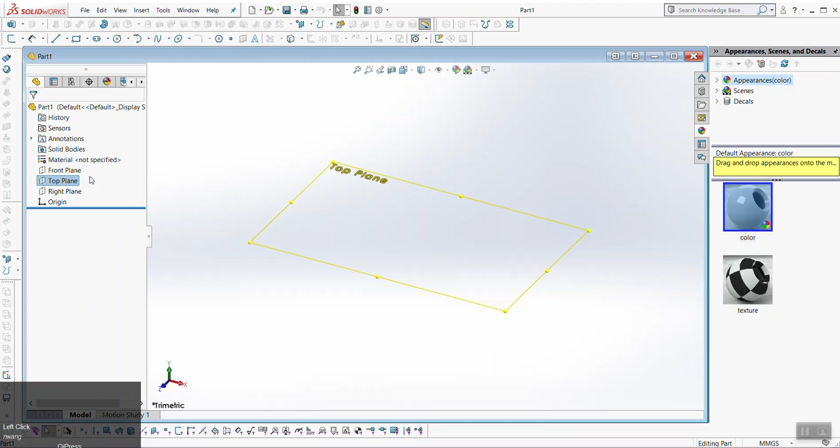Let's all go ahead and, if you have SolidWorks open, go File, New, and we're just going to create a new part. We're then going to take our top plane and create a sketch on it. So for me, when I do that, I go Alt-S. We can use here a center rectangle. It just saves us a step.

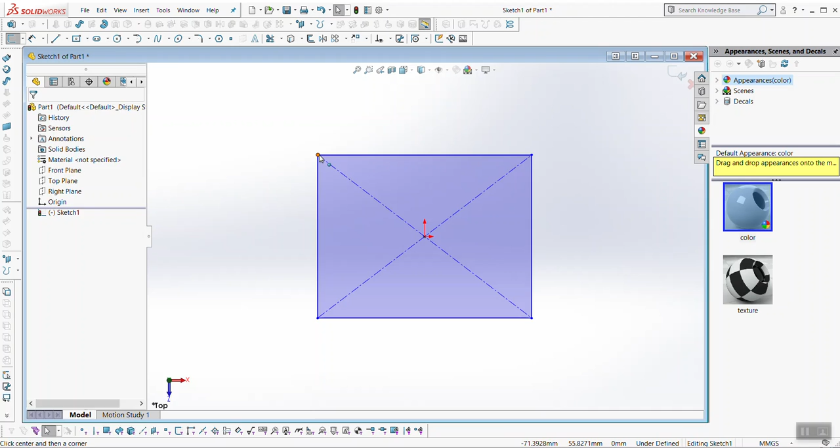It's very rare that I use this. I typically do a corner rectangle and then draw one of these manually, but that's fine. Honestly, for this demo, it doesn't matter what size it is. We're also, God forbid, not doing a master sketch. Oh no, Noah's going to kill us. We're going to extrude this right away.

So, okay, I want you guys to be aware of a couple things. One, I've never pointed this out before, but there's this thing called draft right here. Okay, so let's say I want to extrude this object 25 millimeters. No, this is weird, my scale's weird. Maybe I should have told you guys what size to make this. That's fine, it doesn't matter. Just make sure it looks proportionally roughly similar.

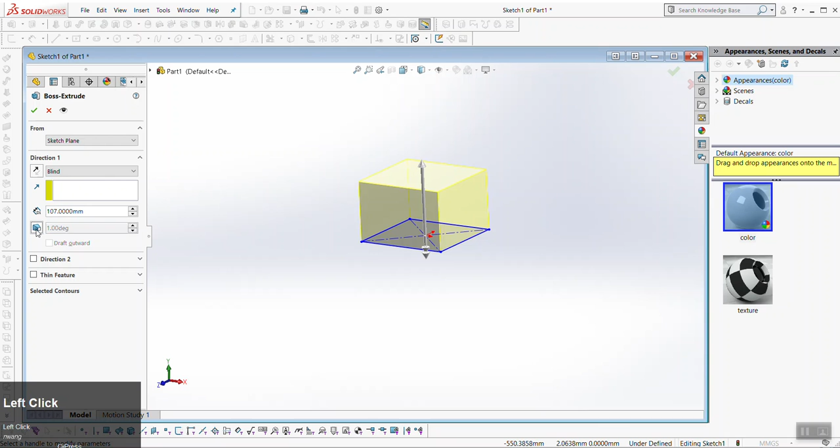Notice that you can click this draft and you see, guys, what happens. It tapers in, right? If I click the other one, it tapers outwards. If I check this box that says draft outwards, it tapers outwards. Now you can play with this dimension. You'll notice the more extreme you make it, the more tapered it gets.

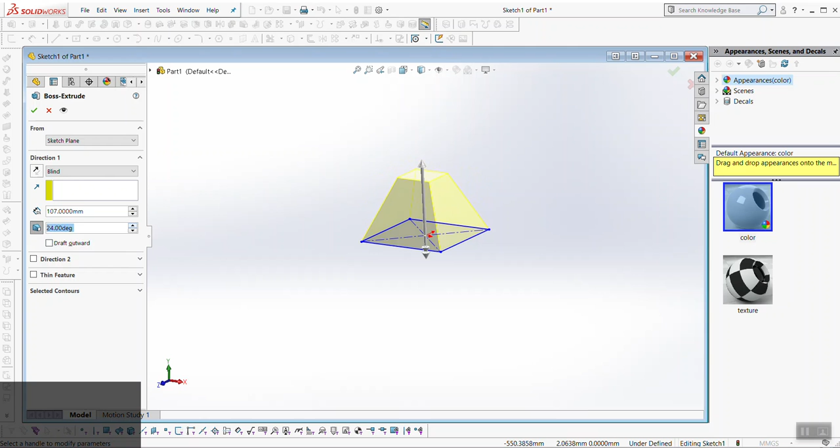Here we go, my brain's gonna stop working. For a rule of thumb for all of you to follow roughly, safe draft is about 3 degrees. As long as you have one though, you're good, honestly. Most engineers that you're working with, comfort level for them is 3. Now it depends, that's very situational, okay?

If you have a very smooth surface, do you think you want more draft or less draft? This is kind of a trick question. What? Yeah, really smooth surface. Oh, I need less draft. That's why I said it's a trick question. It seems like you would need less because it's smooth, it's easy to come out. So here's the problem. If you have a very smooth surface, there's a bigger chance you're going to see tool marks left on it from the two things sliding apart.

Yeah. Texture is a good design detail too. If you have a very sexy surface that you spent a lot of time on and you want it to look good, you want to render that full gloss so that it's really pretty. If you are using a budget manufacturer and you're not confident in their ability to match what it is, you want to specify a texture on your model.

You guys are familiar with Pantone. It was mentioned earlier. There is a texture equivalent called Mold-Tech. Are you guys familiar with this? Oh, maybe you're right. It might be, I don't know. I thought it was Mold-Tech. I don't know if this is their website. Anyway, yeah, I think this is them.

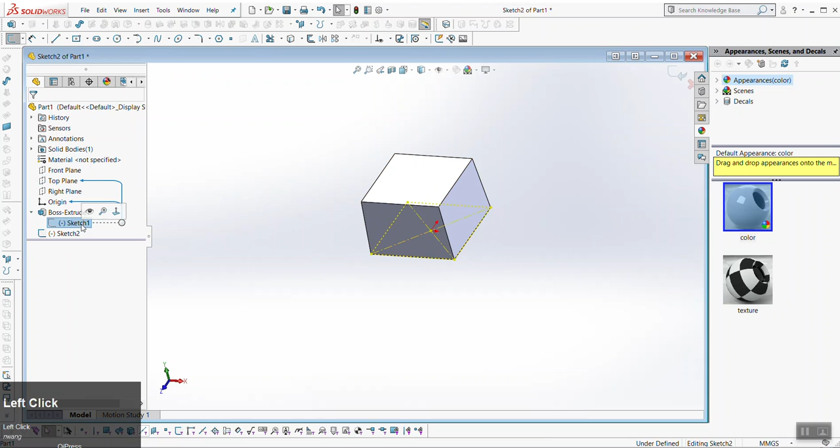So now let's take the top plane again, create a sketch on it. And what we're going to do, we're going to take our first sketch, we're going to copy it. So I'm going to click on the sketch and just click convert entities. Yeah, not the top, not the skinnier part. I mean, yeah, that's a good observation though. Look, if I take a top view, you'll notice the sketch is bigger than where it ended up. Again, because it drafted, it tapered inwards.

So on this one, also hit extrude. We want to go the opposite direction this time, and this time don't put any draft on it and don't merge it. So again, everyone, you should see you have a solid bodies folder here with two parts. One's drafted, one isn't.

If everyone's caught up, what we're going to do, we're going to hide this first body. And I just want to show you guys how to do draft as an individual command. So there is a draft feature. Sometimes you'll build a complex part and then you need to add draft at the end. But you can use this feature here by clicking on it, and it will bring up a new feature dialog.

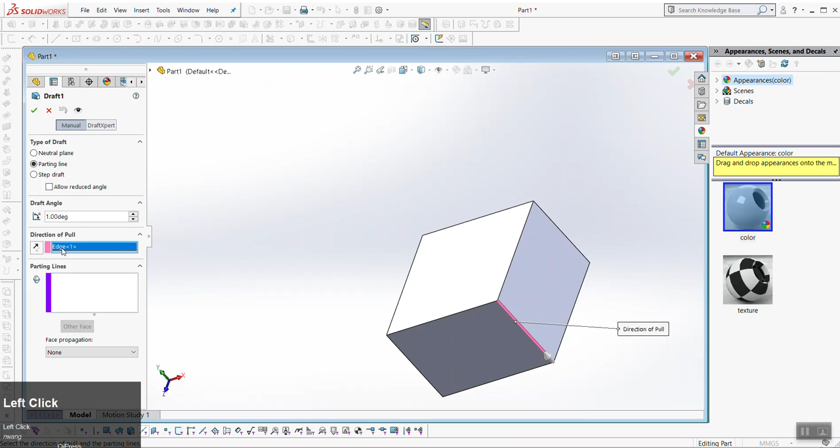Let's see, it defaults to neutral plane. Then there's parting line, step draft. Let's go with parting line. We want our parting line in the middle, so we're going to select this. Although, wait, let's see, direction of pull, that does require a line. Never mind, I'm sorry. I take that back. We're going to start with neutral plane. And then we're going to take the top plane. That's our neutral. I believe this arrow is the direction the part pulls.

I'm going to check this. My God, sorry, hold off a minute. Yeah, did that work? Okay, cool. I'm sorry. I did not check this beforehand.

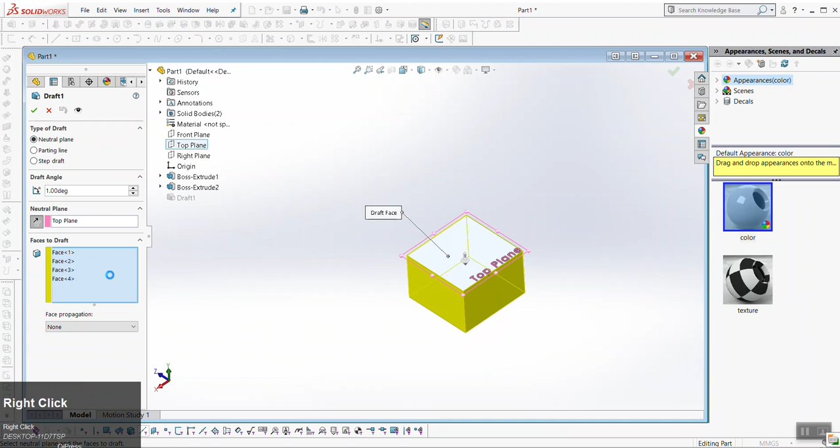Okay, so we put our draft command. We went with neutral plane. I said pick top plane. The arrow is the direction. I just checked this, and now of course I'm blanking. I believe it was pointing up, so that is the direction that the part will be released from the tool. So it drafts, it tapers the opposite direction of the arrow.

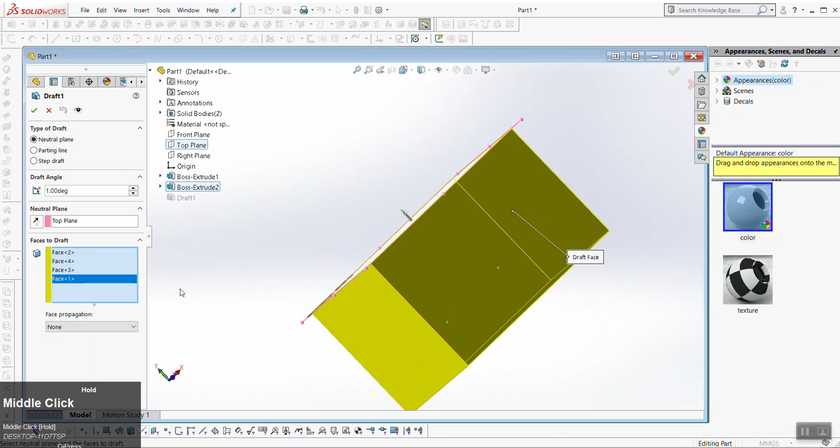So now, of course, we want to pick faces to draft, and we're going to pick all of these vertical faces all around the way. Again, because this is a unique feature, you can always select just 3 faces. Maybe you only need to draft part of it. I don't know. But for this demo, let's just pick all 4. Let's again go to 2 degrees and then click the check mark.

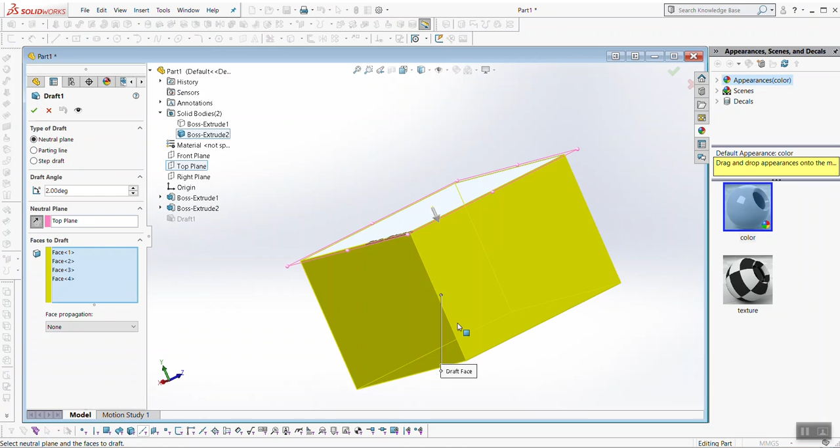I'm sorry, I lied. The arrow, okay, I'm sorry. The arrow needs to point down. The arrow points the direction that it tapers. I apologize. I switched it and then I mixed it up. So sorry, let me start again. We pick the top plane as the draft. Make sure the arrow is pointing the direction you want it to taper, okay? So in this instance, we have it pointing into the part because we want the part to taper. And then click the checkbox.

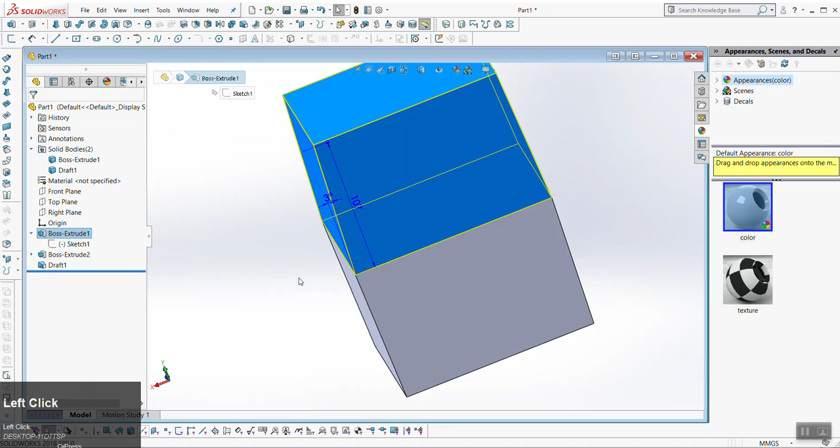And now we have 2 things. Essentially, we achieved the same thing in 2 different ways, is all we did, okay? For this class and for project 3 specifically, I just want you guys, when you put part lines in your objects, and again, when you start by mimicking, the part line should be in a logical place to begin with.

If you start to make adjustments though, just put your part line somewhere that seems logical, and that's all I ask. If it's slightly off, I guess I'll give you guys more details when we get closer to that, but all I ask is just have it be logical. It doesn't have to be perfect, okay? So you do not need to build draft in. I just want to give you guys these tools.

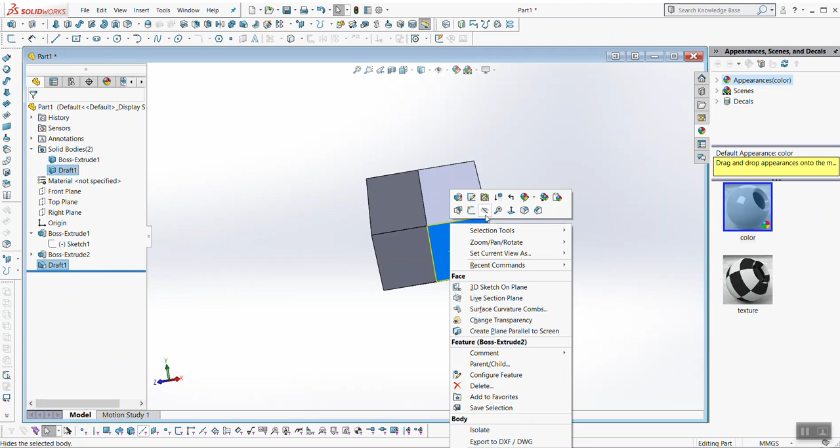Last thing that I want to do, okay, so any questions on what we've done so far? Okay. For what it's worth, I will sometimes use draft as a design element. Trevor, before you were asking about how I cut that face on my microwave, sometimes I will cut a face with severe draft, like 45 degrees, 25 degrees, to get a built-in bevel. That's perfectly acceptable. It's not what it's designed to do, but it's okay. An engineer might turn their nose up at you for doing that, but that doesn't matter.

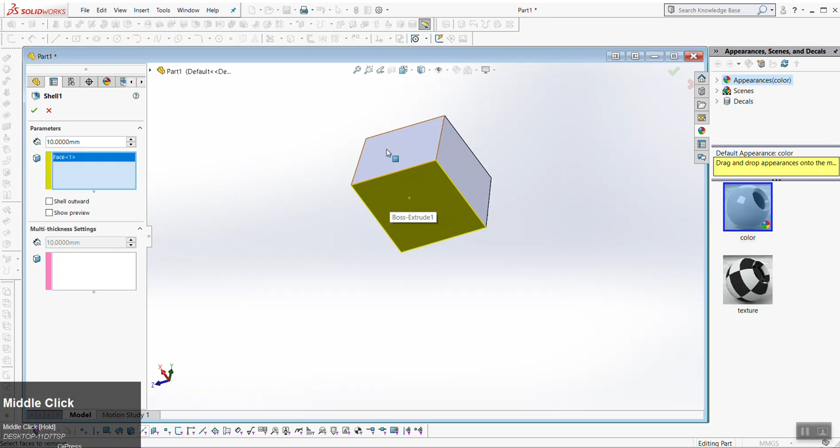Okay, last thing I want to do is show you guys how to shell, right? A shell just gives a part a cavity. So I'm going to hide that bottom body we just made. I'm going to go up here and pick my shell feature. And here, this is asking what face do you want to be hollow. So logically, I would pick just this interface here, but you can pick more than one face, right? I could pick these 2 and click the check mark, and you'll notice right now these are both open. But what I want you guys to do is just to pick this bottom face here.

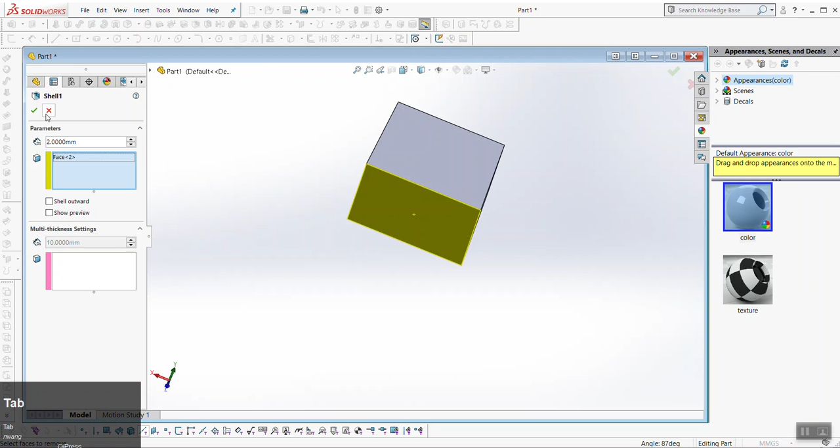Typical wall thickness. I mean, I could grab some calipers and I want to say this is like 1 to 2 millimeters. But let's just go 2 millimeters on our wall thickness here. So what I'm showing you guys is what's called a standard clamshell design. This is a standard clamshell, right? Any idea where it gets its name from? Looks like a clam, right? Yeah. Exactly, like it's two pieces that puzzle together, okay? And this is very standard.

Again, if you start to observe objects in your environment, like, not this one. Anyway, whatever. This is my best example right here. They have this design. So the inside is then shelled. If we hide this bottom face again, we're going to look at a new,

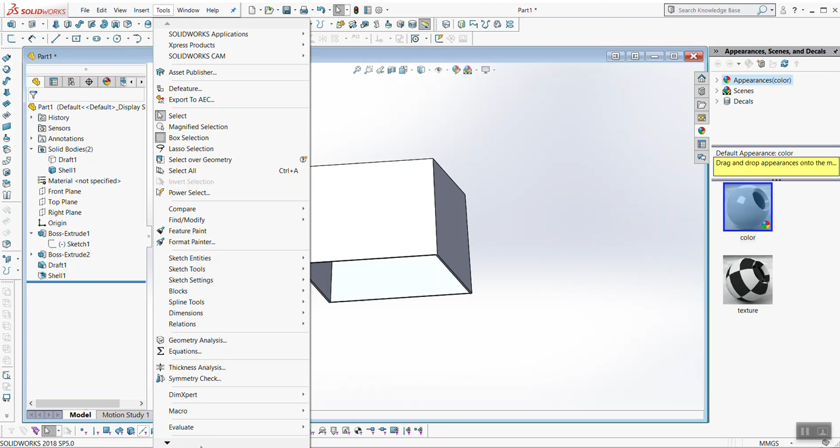Where is this here now? Oh my gosh, I'm totally blanking on it. I'm sorry, guys. I'm looking for... I thought it was under tools. No. I apologize. I'm looking for draft analysis and I'm totally brain farting on where it is. I thought it was under evaluate, tools, but it's not in here. Where would... here we go. I'm sorry.

It's under display. Okay. If you guys go to view, display, it's right here, draft analysis. If you click on that, it's going to bring up a new dialog box. This is not a feature. This is just like an evaluation tool. It's asking you what plane to select. If you select the top plane here,

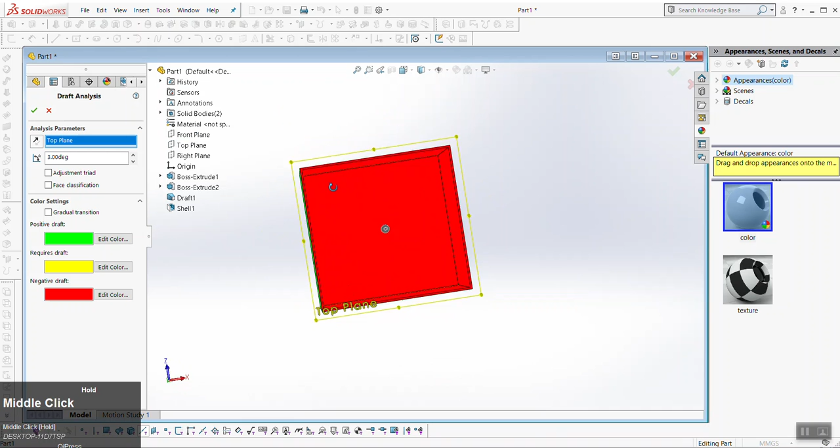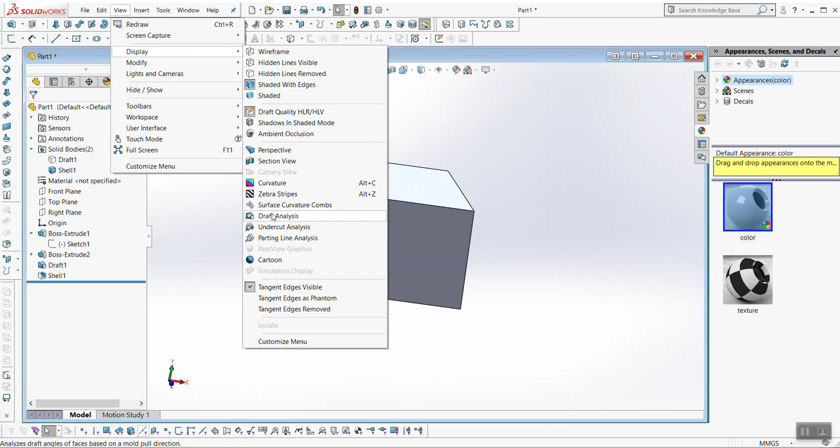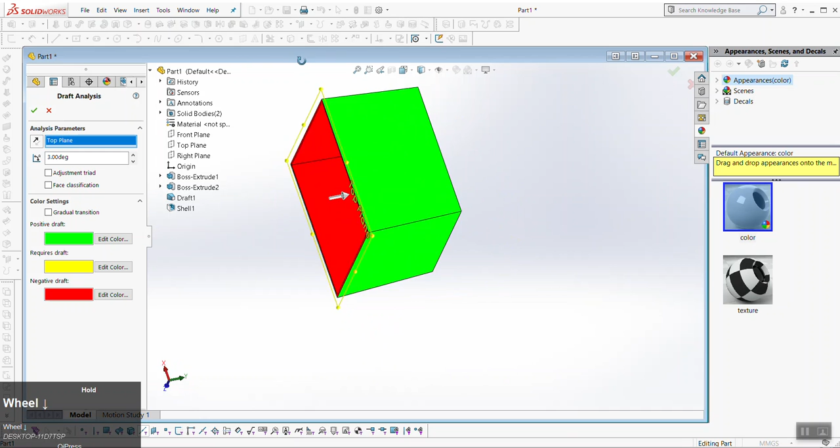Under view, display, oh, sorry, yeah, I missed it too. It's right here, draft quality. Yeah, you gotta go lower. Here it is, draft analysis. Again, it's asking you what your neutral plane is. And again, this is kind of like the plane that the part line exists on top of. So here it's on the top plane. And here, everything green is one direction, everything red is another direction. If you ever see green within a pool of red, it's a bad thing. So here, let me edit this and I'll show you maybe what that would look like.

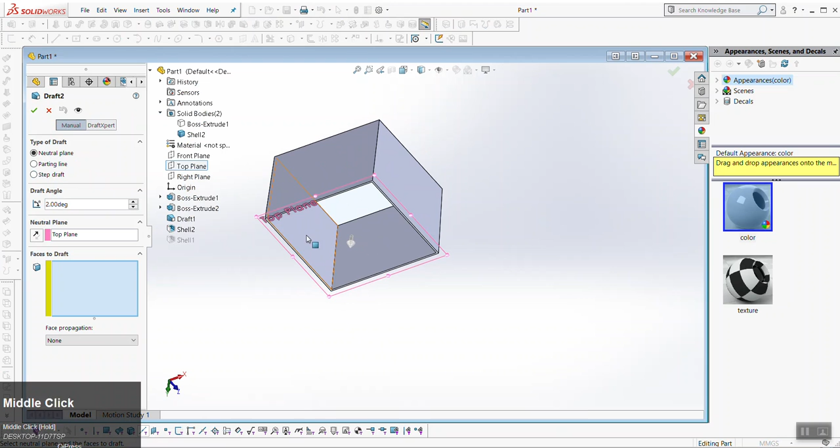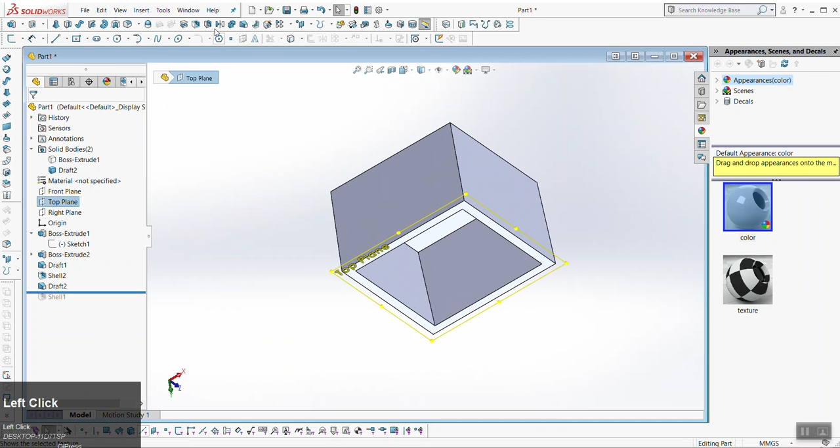So let's say I don't draft this face. Shell this, and then in fact on my top, I could add negative draft onto this face. Did I do that in the wrong direction? Yeah, my file's all goofed up now. Here, let's turn the shell down to 10. Now I put my draft analysis on. If you ever see anything like that, that's called an undercut or reverse draft. That's bad.

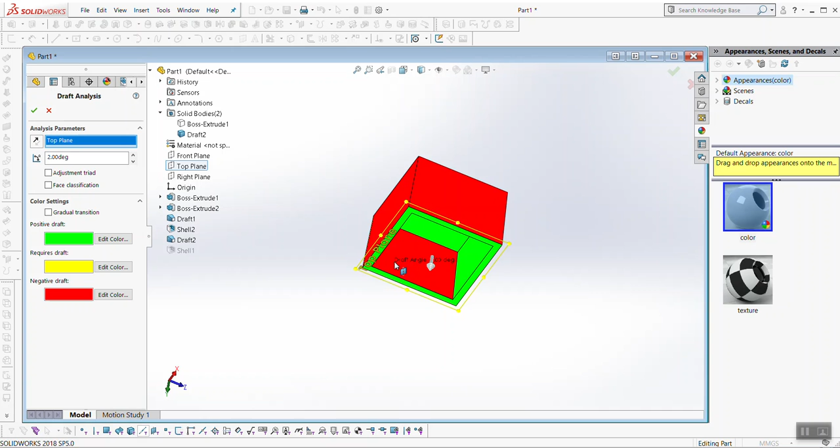Again, a lot of this is higher level stuff that I don't necessarily expect. Just use, to the best of your knowledge, knowing that there is draft, to put your part line where the object is at its widest point, where it kind of opens up. And then again, for our needs, maybe if there is one main takeaway here, it is that when you do have a part line, it is sufficient if you just put a fillet running around the edge; you can have them touch.

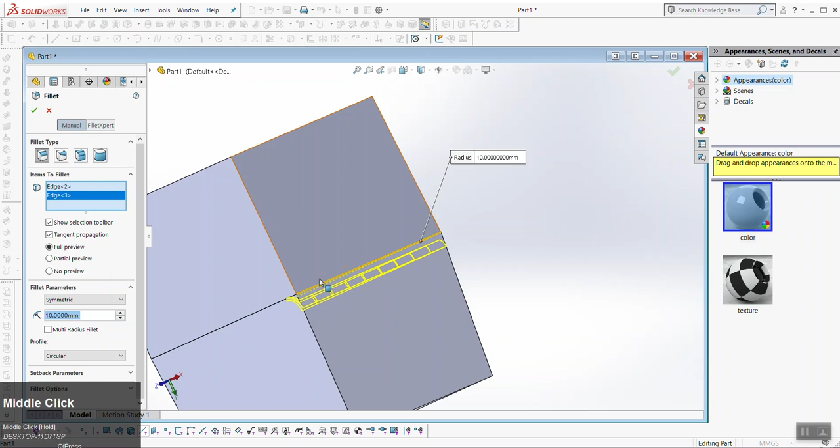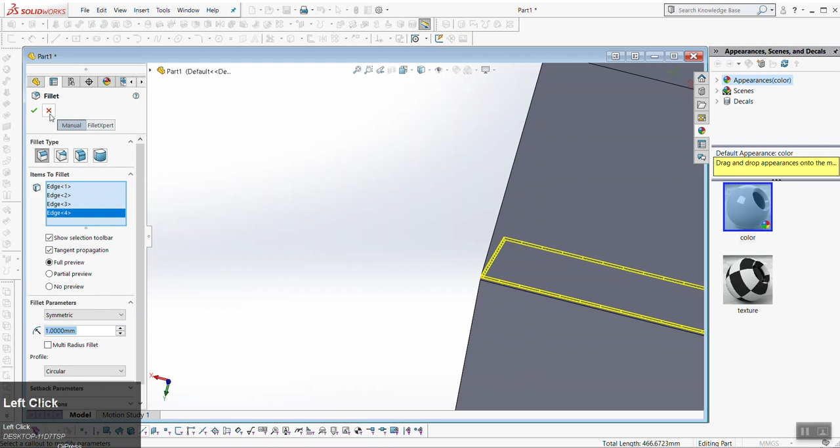I would put like a 1 millimeter fillet on there maybe, or it depends. It's totally up to you. I probably wouldn't go bigger than 1 millimeter, and I probably wouldn't go smaller than like, I don't know, 0.5, 0.2. But now when you render this, having that slight cut like that, that's going to look good.

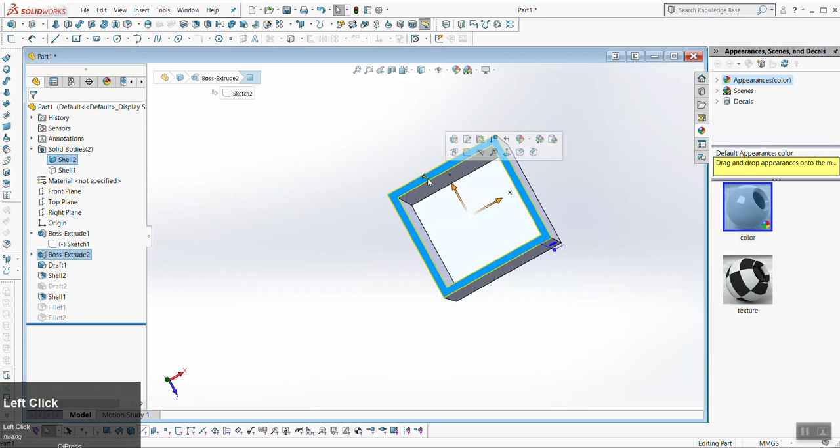At this point, you guys don't need to follow along, but I do want to just show you a quick way how to do a real part line if you wanted to do that. Again, you can take the face where your part line is. Whoops. Copy one edge. You could even just offset this 1 millimeter, 2 millimeters.

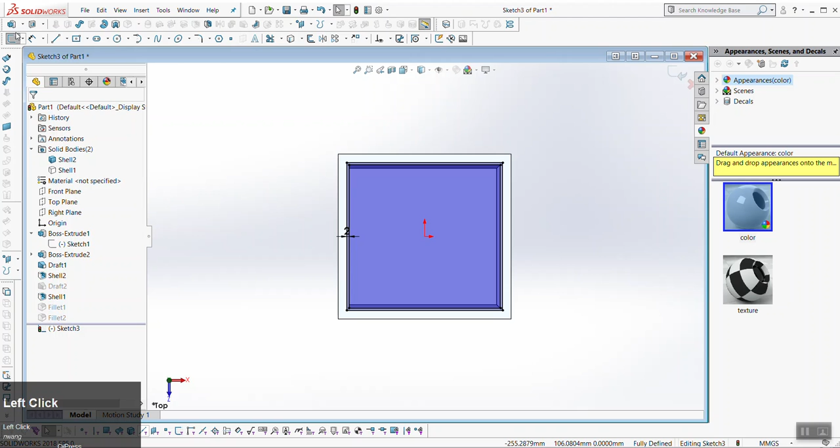Make a low extrude of about 2 millimeters, let's see, 4 millimeters long, 5. Again, we can observe this and look at how long this wall is. That's not more than 2 millimeters, whatever. We'll say 3.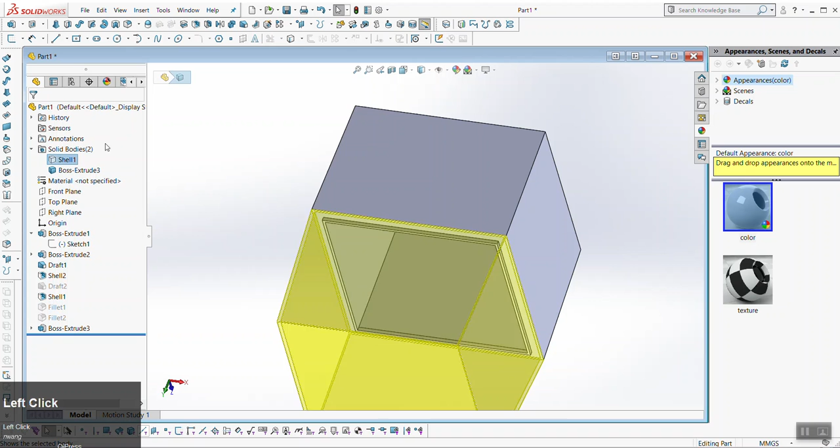And then on this other part, you could do the opposite. Or in this instance, if we just give this a slight gap now of like 2 millimeters, again, we're going to get this kind of realistic view. I guess they've misaligned quite a bit, but I think you guys get the point, right? You do a small offset on one of the lips and extrude it. On the other one, you would do the opposite lip, and then you get something that looks like

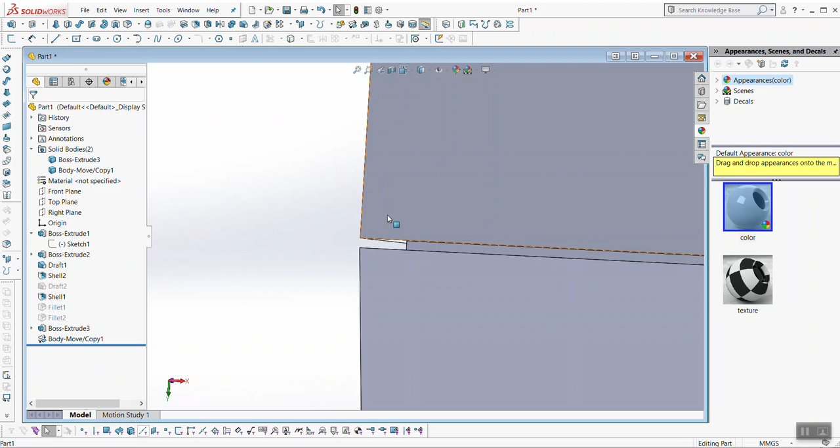that. Oh, yeah. You guys did do a part line in project 1, or the tutorial. You're right. Any questions on this? Yeah. That's a good question. Let's look at what I have. I just didn't save what we did. That's fine. Wait, which orange face? Oh. Gotcha. I see what you're saying. Let's look at that so we can talk about it. Yeah, I remember. You were talking about this one.

Yeah. Oh, absolutely. You can always split the part at the end. And you could use the draft tool if you were trying to be more accurate to add that feature. Here's kind of where I stand with this, okay? If you put the part line here, I might question you, because this is reverse, this is very steep going the opposite way. Even here, it's somewhat questionable, but it's okay. The lower it is, the more believable it is.

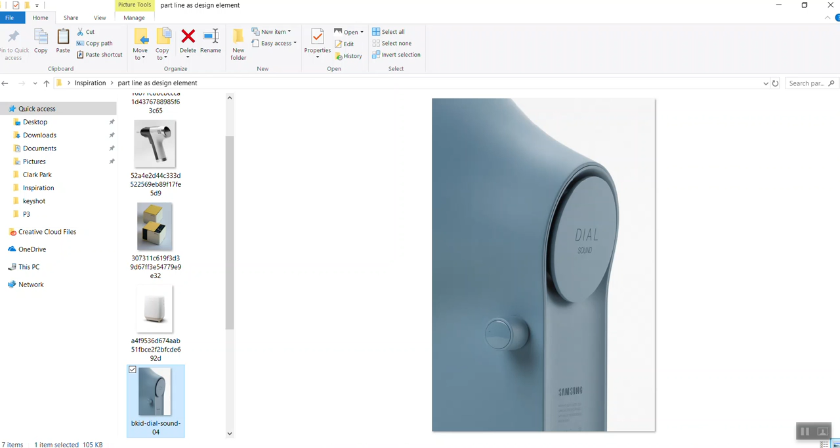Absolutely. You can build, and in fact, that's what I would recommend. I would almost recommend you build the form all as one to begin with. That is the other way you could use draft analysis. You could literally use that draft analysis tool and see where the part line should be. So I'll give you an example here. Right? Where that yellow line is, that's probably where there'd be a good part line.

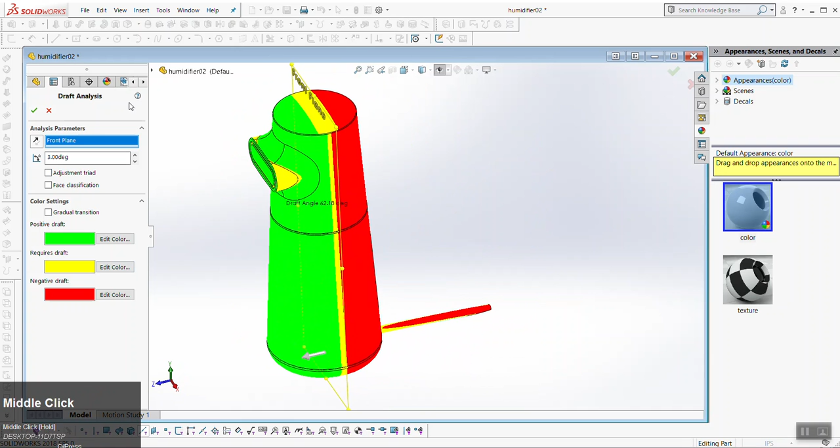I can change this and see, hey, could I put the part line this way? Yeah, that kind of makes sense. How about on the top? And then here it's telling me where the part line should be. It's right here, but look at that. That is where the part line is. So that there's no mistake there.

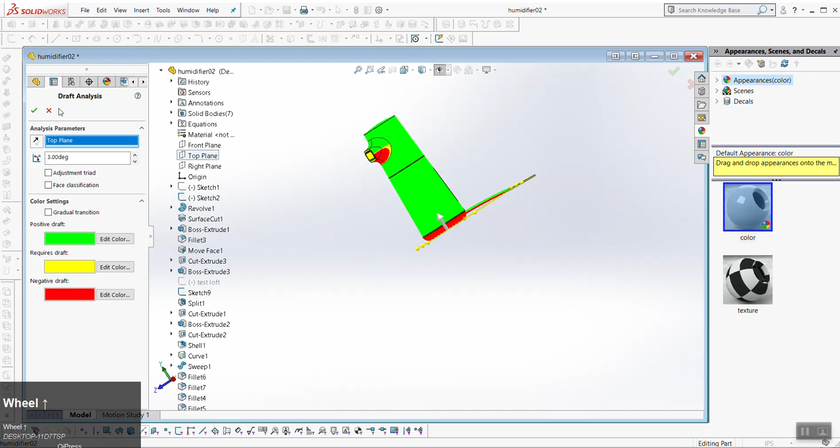Simply fillet it, and that's all I expect you guys to do. Yeah. I did these part lines, I think, with a split line. Or no, let's see, where is this? Here it is. It's right at the top. Yep. And I built it in halves.

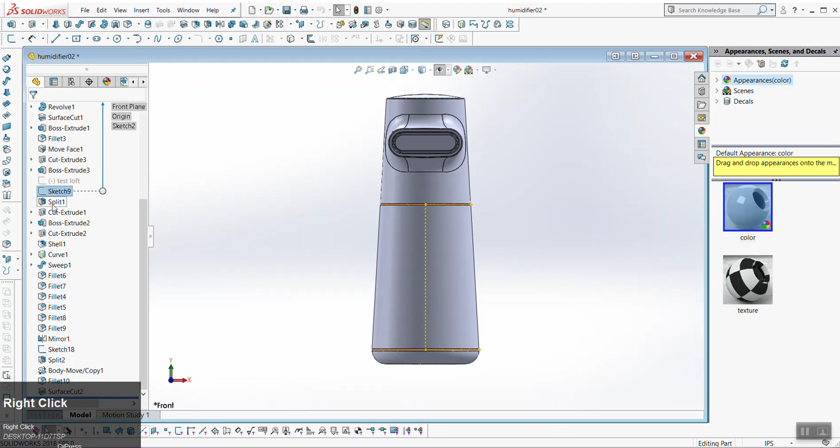Honestly, if you're mimicking one of these objects, chances are the part line's in the right place to begin with. So you could keep that in mind, like, okay, maybe I shouldn't have something that tapers the wrong direction from where it's already tapering. I should just exaggerate a taper. So here, let's look at what I did, my redesign.

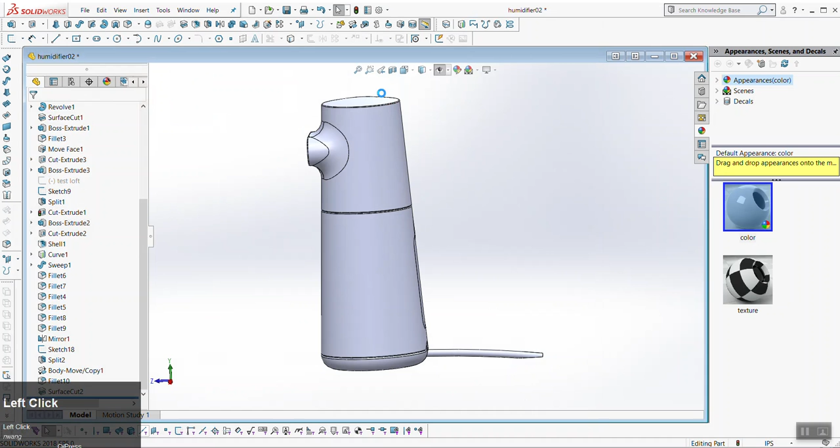I moved a part line to the top here to split this. So that's the one criticism I have of this one, is this part isn't moldable. It is moldable with...

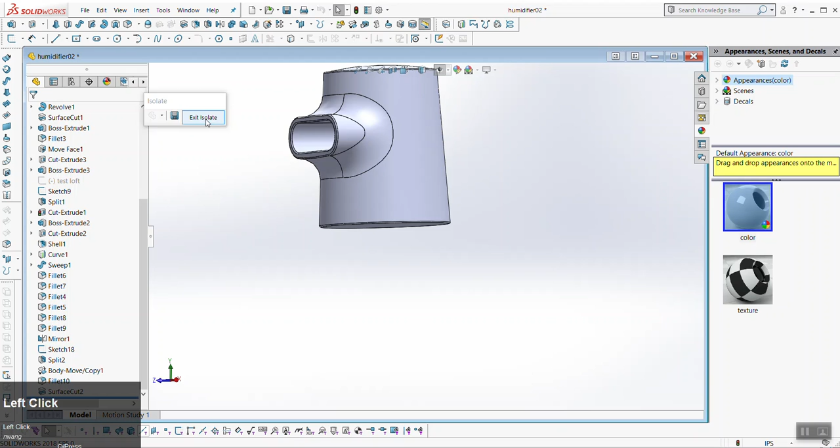Have I showed you guys this isolate feature, by the way? You can select a body. If you right click on it and say isolate, it hides all other bodies. So it allows you to work just on that. And then you can always click exit isolate when you're done. All that's doing is you're saying, hey, out of all of these bodies in the list, only show me this one. That's all that isolate's doing.

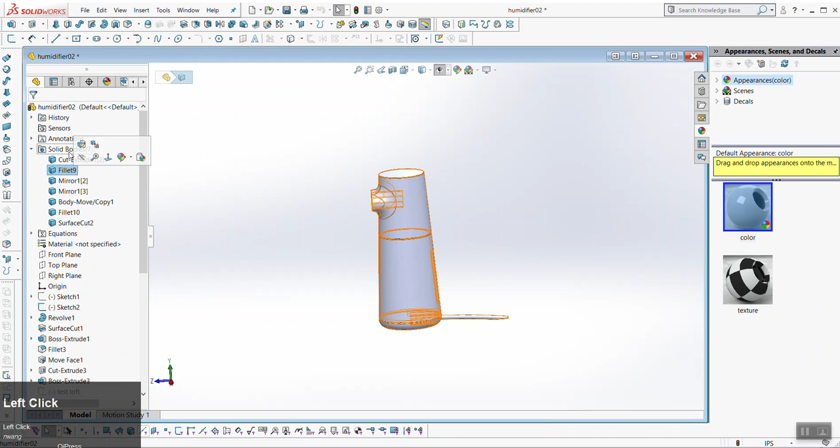My criticism on this from the internet is moldability-wise, and you can see here, this is pretty rough. It's not even shelled, which again, is fine. Depending on your needs, you probably don't need to shell it. It's not a requirement. If the interior of the shell is visible, then it should be shelled. If it's completely hidden, I don't mind if it's a solid body.

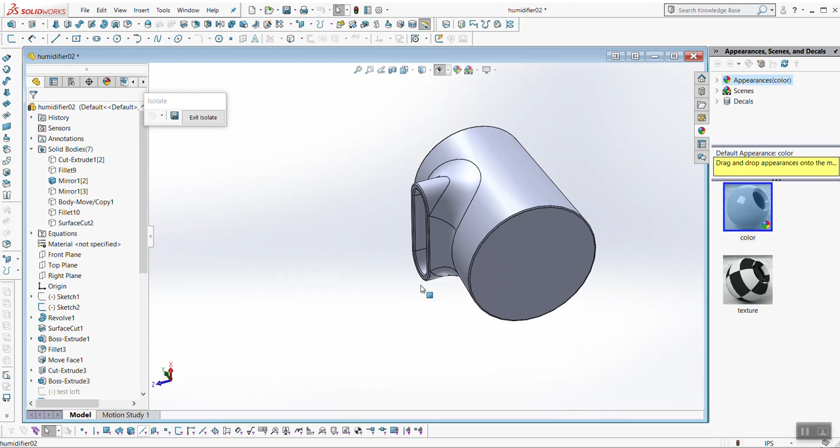To mold this would be pretty complex, actually. You would probably have a split here, left to right, and then you would have a core coming out of here. So this would be a 3-part mold, left to right, and then something coming out of the inside.

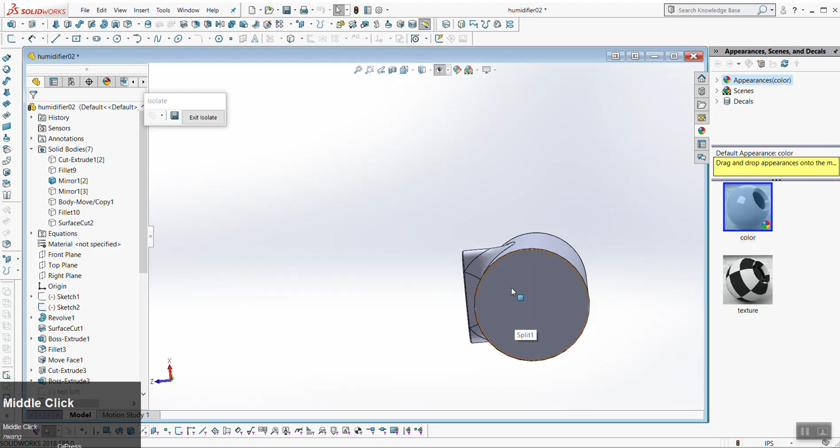Speaking about that, I forgot to mention, there is another version of a part line, which you don't need to worry too much about. Sometimes you have an object that gets a part line from just 2 pieces of tool meeting, but it's within the same part. Up until this point, we've been talking about part lines as a body coming off of another body. You can have a part line on the same body where 2 tools slide together but come apart. I can't think of any examples that I have right now.

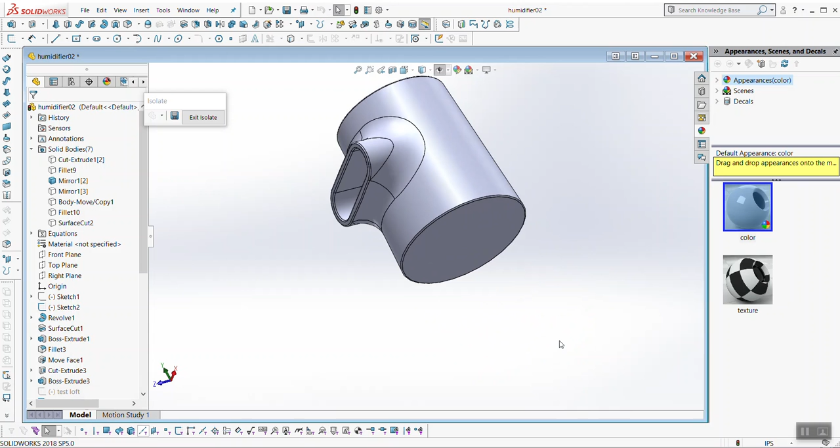I'll pass this part of the camera around. Look on the shoulder here. If you look really carefully, you will see a very thin piece of plastic right here. That is a part line that exists on the same body. So there would probably be a very slight visible line along this edge, unless what? Let's say you wanted to hide that line that would appear on this edge from the 2 tools coming together.

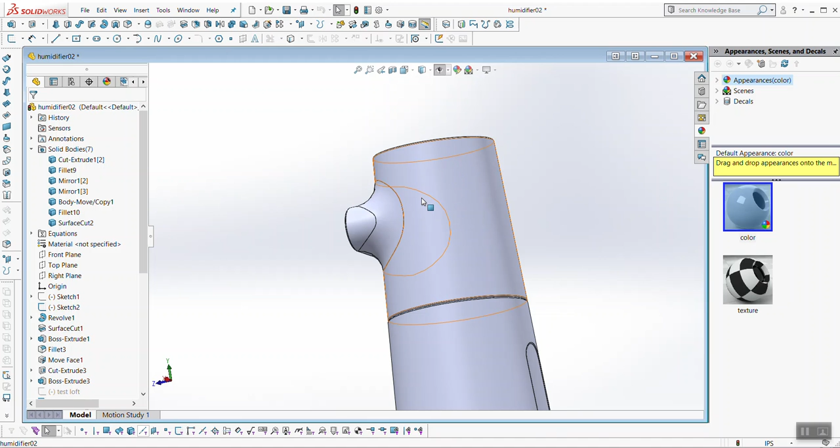You're along the right track. You're thinking along the right ways. Okay, I'm glad you mentioned silicone. Silicone allows for some reverse draft because it's flexible. So if your material is rubbery and can pop, it's more forgiving. I was going to say mold tech. You would want to hide it with texture. If you put texture on there, it would hide it. Okay.

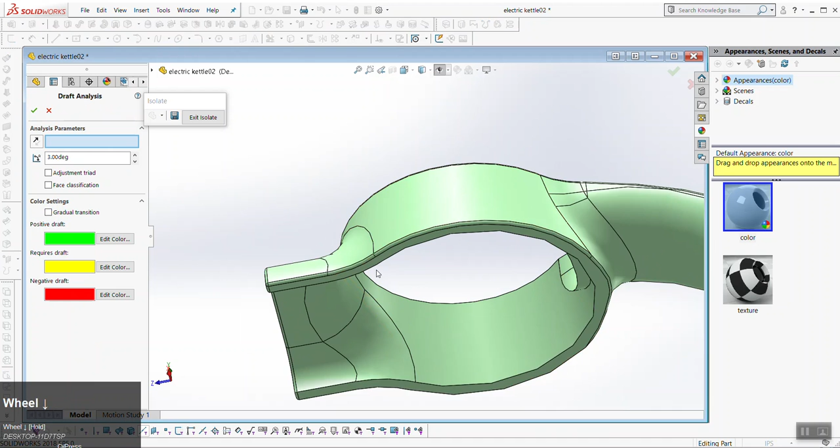I moved the part line here because I built a handle off of it. I did not check my draft analysis, but we can see. Again, I'm not going to be grading you guys with draft analysis, so don't worry. But I can select this face here. So let's see, I do have an undercut. This is an undercut right here. If I was sending this out to an engineer for molding, they would request that this green would come straight down at this point.

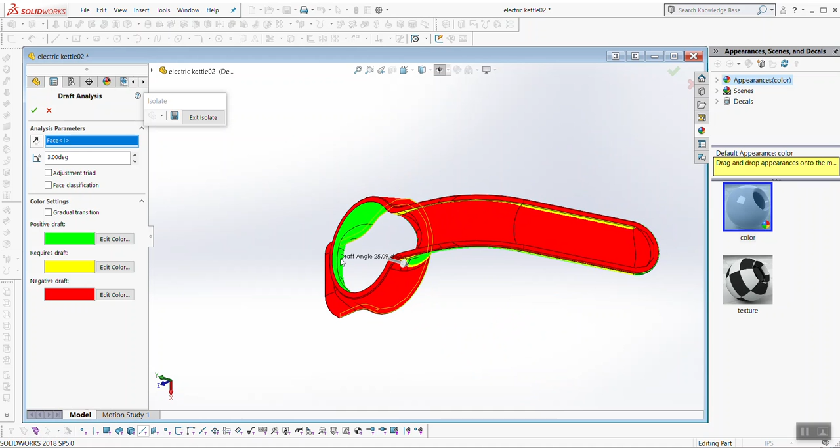Again, this is slightly more advanced stuff. I'm not too worried about you guys. I'm trying to arm you guys with all the knowledge, if this is starting to really push the boundaries of detail. Any questions on this? Okay.

No, there's project 4.